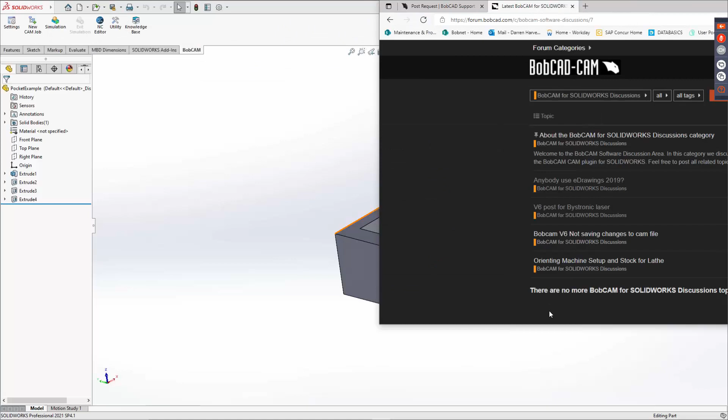So with that, I'm going to be working in V9 here. And again, I'm not going to be drawing anything in SolidWorks or anything. I'm just going to import models and work it off from there.

Let's just kind of take you around. If you haven't downloaded it already, you should go to add-ins. If BobCAD doesn't show up for whatever reason, make sure you check it off so it will. You can have it start up every time you open up SolidWorks, and you can have BobCAM also open up. We also put a tab up here with our knowledge base.

This is where you can set up hole parameters, basically for holes, counterbore holes, tap holes, and counterbore tap holes. Each one has different options. You can put an operation list in there. It just makes it a little bit easier when you go in and do your hole recognition, so we know what you're going to actually do.

So like a tap hole, one of them has a chamfer mill. If you don't want to use a chamfer mill, you can use a chamfer drill option instead, so you can change that up. You can add your own in here, and you can delete any of them. So the knowledge base is basically set up for holes, counterbore holes, tap holes, and counterbore tap holes.

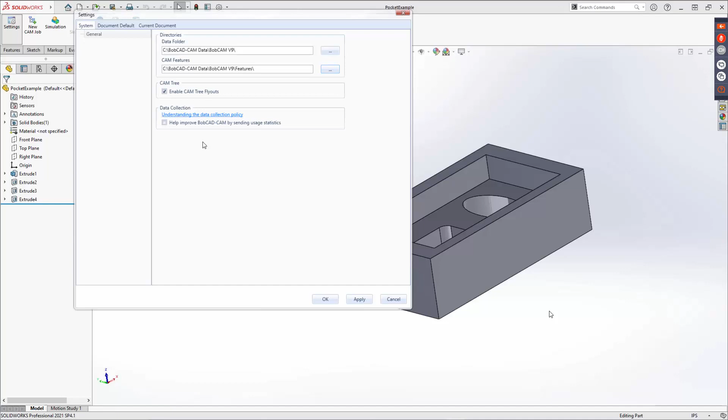So again, if you guys want to opt out of it, you can go into the settings under system and general, uncheck 'help improve BobCAD by sending your usage statistics.' You can uncheck that if you want. That's up to you.

Now we got our current documents and default documents. Notice nothing really changed in there. So you can set up your CAM tolerances, your simulation tolerances, your default machining order, how you want to set that up, your toolpath color, what color you want to set it up. Any of the changes that you made in this current document, instead of going over to default documents and doing the same thing, you just come down here and hit apply to default. Or if you do it under default, you can say apply to current document, and it'll work for the current document that you're in. Once you're done, you just hit apply and okay with that. And that's it with that.

Any questions or anything so far?

All right, so I'm going to go spread out the window here a little bit. Under the CAM Tree Manager tab, we have CAM Defaults. With the CAM Defaults, if you right-click on there, you got New Job, which you can do. If you've been with the software long enough, V4, 3, 5, 6, 7, 8, and up here to 9, you'll remember that in earlier versions - I can't remember exactly when we changed that - a lot of times you would have to go into the CAM Tree Manager here, right-click on CAM Default, and click on New Job. I still do that occasionally in SolidWorks here, but I've been trying to train myself to go into New Job up here. Again, I know some guys will still do it the old way, which is fine. We got our job from templates, if you want to use that.

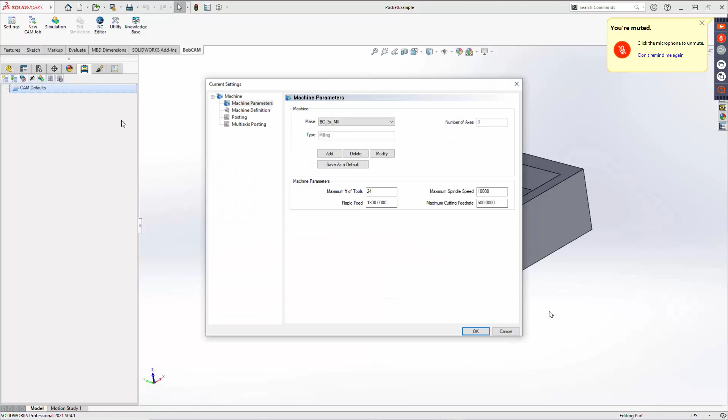Any of the default templates that you save, you can open those up and use those templates. We got our current settings - this is the default, remember. So you got your machine parameter, you can choose what kind of machine. You'll have a whole laundry list of them in there, probably not as much as I do because I work with customers every day and all day long here, so I usually grab their machines, or I'm creating one and helping out with posts also occasionally. You got different types in here that you can choose from. We also got an add, delete, and modify. I wouldn't delete any of the ones in here.

If you're specifically using like a Haas, a certain type of Fanuc, a Mach, or a Siemens controller, please don't delete all the machines and posts in here. Sometimes you might need to go in and look through them—maybe if you got a Fanuc post and something's wrong, we use the BC3X mill because that's a Fanuc based post, and we want to cross-reference to see if everything was working or not. So just don't delete all these. Leave them. What you can do is set up a default, so every time you right-click and do a new job, your proper machine and post-processor will show up if you save it as a default.

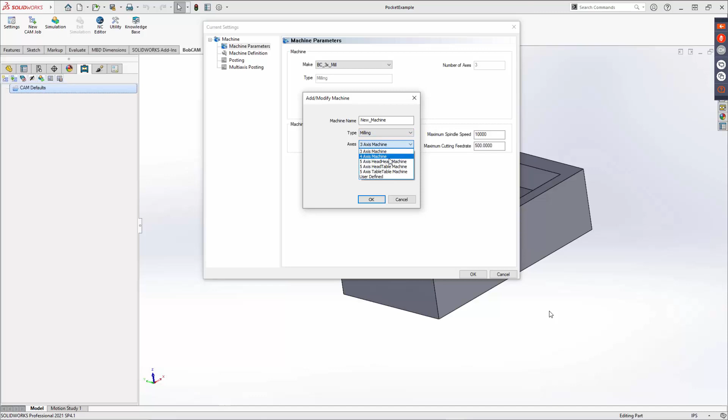We do have videos on YouTube, and they're a few years old, but they still work to this day because it's still the same setup. If you type in BobCAD space machine configuration or machine definitions, you'll get a whole bunch of videos on setting up your own machine if you want to. It'll go into setting up these machine definitions, what they're used for, and why we use them.

And again, this is if you have Machine Sim Pro—then you'll want to set this up too. If you have models of your machine, it'll show you how to import those in there. If you guys have Machine Sim Pro on your license, most of the time the mill-turn, multi-axis machining guys out there get a hold of our post department, and when they create your post, they'll even do a machine definition for you since you probably have Machine Sim Pro.

Now, a little caveat there is that we do require you guys to get the parts for the machine and send them off to us. We may have the machines, but if you send it to us, we can put it in your file, and if there's any changes needed to be done, we've got it all in your file. So again, we've got the machine definitions for this.

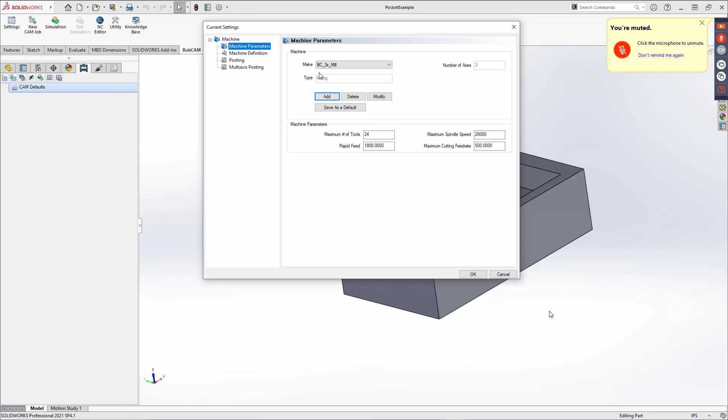But anything that you've changed in the posting, machine definition, or machine parameters, go ahead and hit save as default if it's your default machine. Now again, if you guys are running multiple machines, whatever your primary one is, that's going to be your default one, and then you can hit the drop down in the stock wizard later on, and I'll show you how to do all that to get what you need, whatever machine and post you're using.

Also in here we have our cutting conditions, so you can set up your center drills, pecking, reamers, chamfers, counterbores. You can set those up. Now, I've only seen this a handful of times of guys actually setting these up. They usually just do it right on the fly, especially for the pecking.

And that pecking amount looks a lot different than what I have on my standalone, but that's fine. Again, you can adjust it right on the fly. And this is stuff you don't have to set up immediately. You can set up later on down the road if you need to.

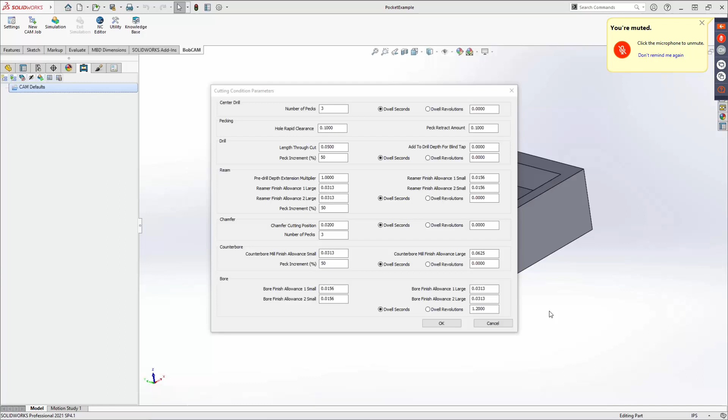When we go in to do a 2-axis toolpath and we happen to do a profile, even router guys, I would do this occasionally on my software, on my other computer. But specifically laser plasma and water jet guys, they would come in here and take out the rough because they don't need that, and they'll exit out here. Then all they'll have is when they get into machine strategy, because all they're doing is profile cutting. They're not doing pocketing, chamfers, drills, and so on. They're basically just doing profile cuts.

So they'll get rid of it, so they don't need to worry about, in the patterns page, the standard side roughing or contour ramping, or on the parameters page, all the allowances are set to 0. Those are things they don't need to worry about.

Where on my software personally, for a router, because I was doing a lot of flat router cutting, I would get rid of the finished toolpath and just use the rough. A lot of times I would use either contour ramping, if I didn't do standard, basically to keep the tool engaged the whole time.

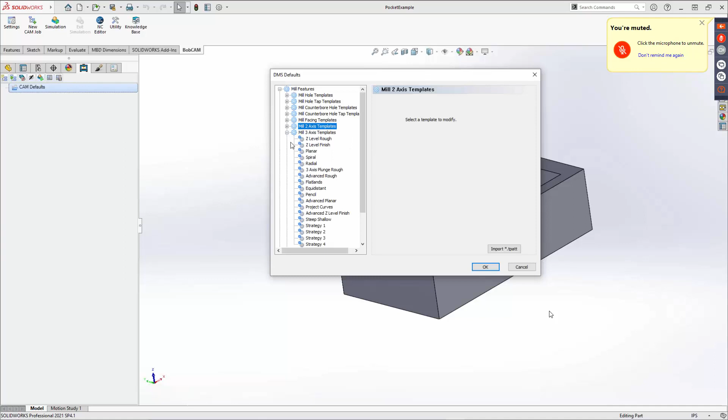So that's what the DMS defaults are when you get into your strategies page. Again, you can change like strategy 1.

You're going to see Z-level rough and planar. Z-level, or strategy 2, you'll see planar and Z-level finish. These are ones that you can change. So if there's something you like to use all the time, like on this one, you can get rid of the planar, for example. And we got an advanced rough and Z-level rough, or let's get rid of that and use advanced Z-level finish. So we got an advanced rough with an advanced Z-level finish, and that's going to be under strategy 3. So it's not going to be the default one that we have in there.

What does DMS stand for? Dynamic Machining Strategy. That should answer your question. DMS, Dynamic Machining Strategy.

So then we got strategy 4, where you got 2 advanced roughs, equidistant, and pencil operation. We're going to go into a lot of these operations later on. So any other questions with the DMS, which again stands for Dynamic Machining Strategy?

The funny thing was, somebody asked that a couple weeks ago when I was in Dallas on a seminar, asked me what DMS was, and I totally blanked out. I had to log in, open up our help file and find it because I just totally blanked out. I must have had too many tequilas or something that night. But anyway, no, I'm just kidding about that part. But I blanked out, so now I remember that every time now. So that's why I said it three times just to make sure, so you guys wouldn't have to worry about that.

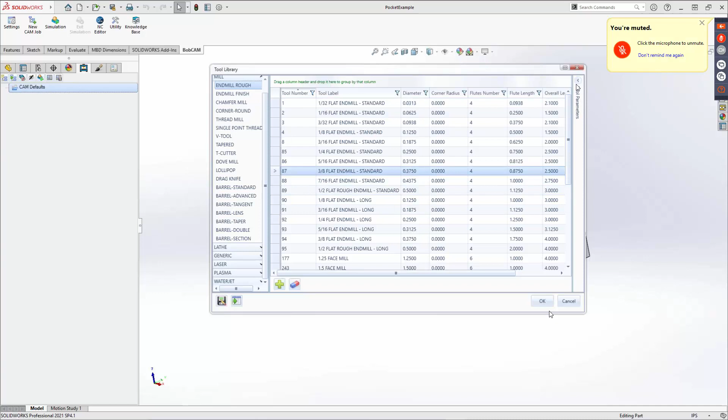If you choose any one of these, I'm going to go like end mill rough here temporarily, for an example, and choose like this 3/8 tool. And over off to the right here, you got your tool parameters. So with that, this is in a modified state now. Come in here and you can modify any one of these tools, okay? All the preloaded tools in here are modifiable.

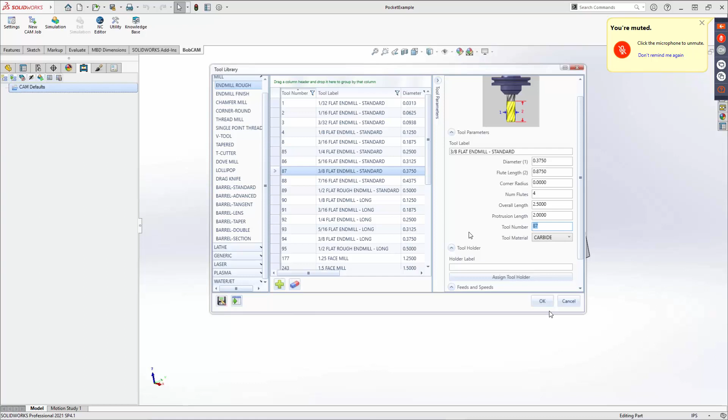You can come in and change it to maybe carbide and tool number 1, depending on how you set it up. You can assign a tool holder. You can come down here to the feeds and speeds. If you uncheck use system feeds and speeds, you can put in whatever spindle, plunge feed rate, and cutting feed rate that you want to use for that tool.

Now, with that said, when you're setting up the tools and the feeds and speeds on here, if you're going to do this, something like this null and voids basically what our material library is calling out for feeds and speeds. So kind of be careful. It's kind of one of those things. Do you want to use our material library as your feeds and speeds, or do you want to input your own?

It's kind of up to you, and honestly, it's like an 80-20 split for me when I talk to customers on this.

I don't know what's considered an older machine, what's considered a newer machine, that kind of stuff. But when they say, hey, I got this home-built machine and the feeds and speeds that you guys have for carbon steel or titanium or whatever are perfect for my machine, hey, go for it. I'm not going to stop you on that. But then again, we got guys with newer machines, and they're like, hey, your feeds and speeds are old. I get it. Nine years ago, ten years ago, development opened up an MSC catalog and said, here's the feeds and speeds that we're going to use for materials under the material library.

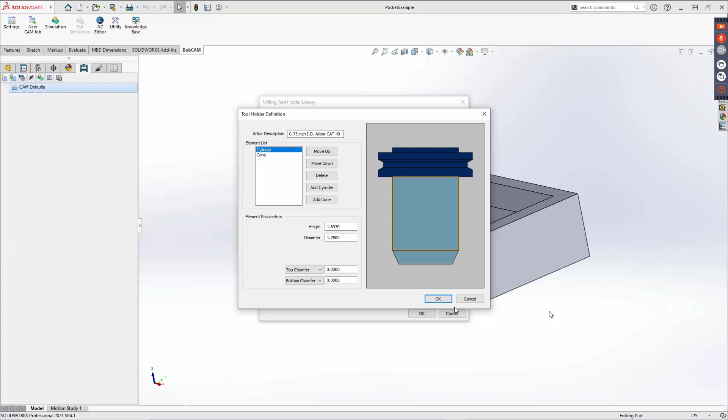Also, we have our mill holders - again, these are CAT 40, 50, and BT 40. So again, if you want to add, delete, modify or edit any of them, you can. You can see you've got, you can choose either cylinder or cone in this one. With that, you can also do a top chamfer, top fillet, that kind of stuff. You can do a bottom chamfer, bottom fillet if you want. You can set up height, diameters, that kind of stuff in there if you need to. So you can modify any one of these if you want.

And you can see we've got Renishaw now in there - there's our CAT 50s and our BT 40s in there and stuff. So again, you can add your own, you can modify any one of these if you need to.

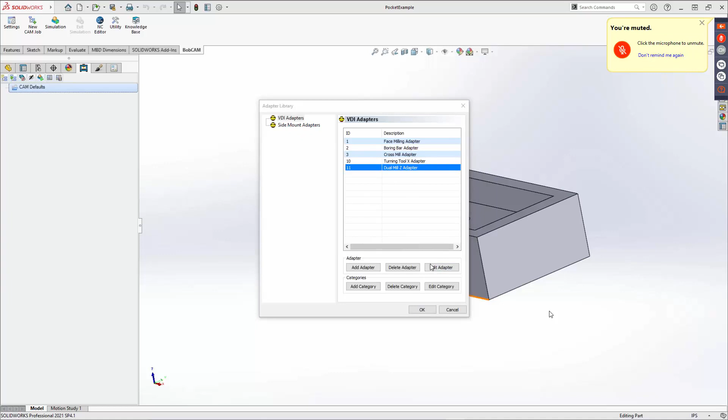Then we've got our adapter libraries. I'm not going to go too far into this one because this is more for the mill turn live tooling people out there. So you've got VDI adapters, which you can either edit in here. And with these, you can either load an STL in here, or you can modify it or add your own, draw it up in here. But yeah, you can see these are set up just a little bit differently than the regular tool holders - these are, like I said, for the mill turn live tooling customers out there, and you can move those around and everything.

Then let's see, we got that. And then we got our thread and material library. So it's thread library, there goes all our different tapping groups that we have, you know, BA all the way down to UNS in there.

You got UNC. So again, if you want to add your own tapping group, if you don't like the ones that we have, or you got something different that you want to put in there, you can add your own tapping group, and then you can put in your own thread list here.

Now you could add or modify any one of these threads in here. I'm just going to hit add a thread here, add or modify, both the same screen. You just fill out all the information along here, and you can add your own threads, or you can modify any of the threads that we have in here.

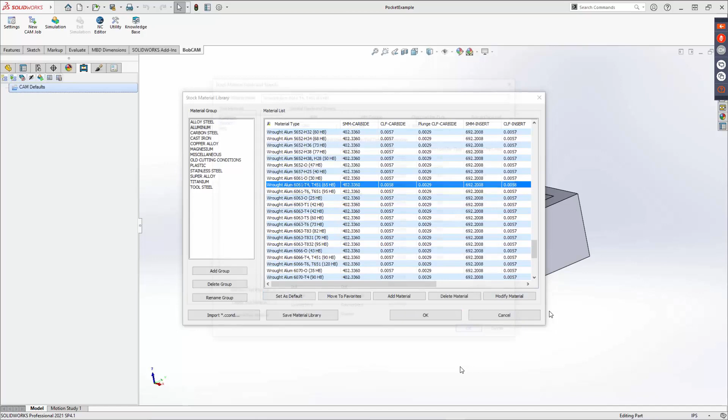You can scroll through, you know, different types of aluminum here. You got 60, 61 T4. The T451, you can add that as, you can save it as a default, so every time we go through the stock wizard and we get done with the stock wizard, that the material is always going to be that aluminum in there. You can modify this material, and you can choose what kind of tool material you're going to be using on it.

Is it carbide, insert, high-speed steel, HSS? You can also add your own new material, tool material. And whichever one you choose here, you'll notice that all these numbers are changing in between them.

Like I said, they just opened up a catalog there and went through and put in all the surface feet per minute, this SMM in there, all that kind of stuff in there. You can change the stock material if you want to.

If you check this off, you notice you can come in here now. This is all active in here. You can come in and put in your own options and stuff in there for the SMM, surface meter per minute, chip load, and flutes per plunge chip load here. You can set those all up on there.

And you'll notice that, you know, when you go and do each one of them in there, let's see, I think I may have changed one, I don't remember. Hit something accidentally in there, but whatever, I'm not too worried about it on there. So whatever you want, if you guys know all this, go ahead and put that in there. If not, you'll be fine any which way there with that.

Let's see something here. Oops. So yeah, we got different materials that you can set up if you need to in there and stuff on that. So any questions or anything so far?

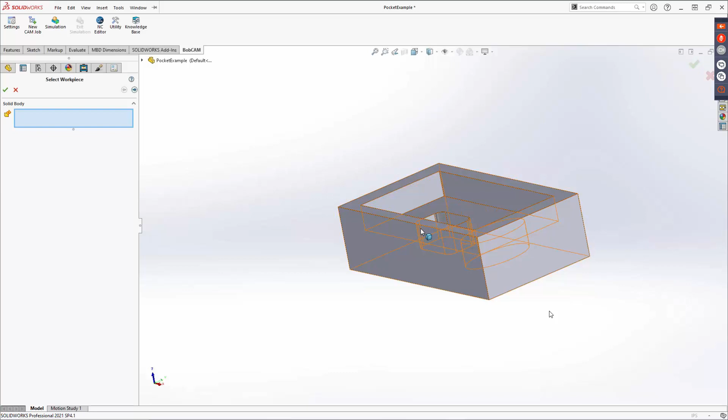From there, I'm not going to worry about it today. I'm going to go ahead and hit the next button right here.

This brings up our stock type here. So right now we're looking at a rectangle, but we have an option here for a cylinder, wireframe, solid model, STL, and revolve, so you can choose any one of those. I'm going to use the rectangle here. Moving on down, I don't need to worry about any offsets or what direction it's going, everything should be good. So from there, I'm going to hit the next button here.

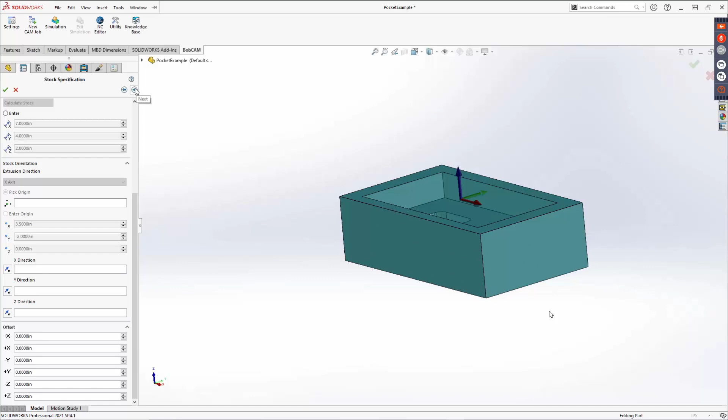This brings up my snap points for setting up for my machine 0 or part 0 here. So my origin is already selected, so I can come in here and choose either a snap point off my solid model, or I can choose any one of the snap points that are showing up on my screen. You can see, you can put it at the bottom if I want, or at the top.

If I need to change the direction of my X and Y, I can do that. So if I want my X to go down where the Y is, I can click in the box right here and choose that snap point, and you see my X and Y change. I can also change my X and Y if I needed to, or my Z. So if I go here to Y and choose there, it's basically gone back right to where I want it. Or I can pick from an existing UCS if I have one set up, or if I need to.

Also in here I've got my clearance plane. The clearance plane is the safety of your tool to move in and out of position or back to the home position. Once it's done, once it comes out of the part or off the part, it's going to go 1 inch above the part there and move either home or out to position, whichever one you're doing there. And again, that's a number you can change right there.

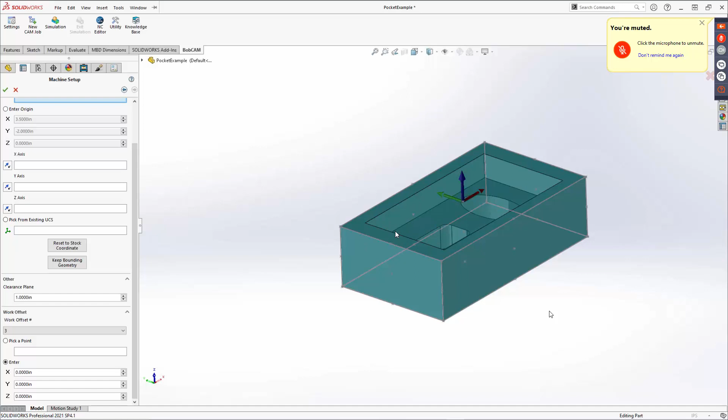So with the work offset here, if I set it to work offset 3, which would be G56, every time I go into posting on this part, whatever pocketing or profile or plunge rough, whatever I'm doing on this, when I get to the posting page, it's going to show the work offset 3 in there.

So I don't have to change it. A lot of times people forget about that and just do it right on the fly, which I still do to this day if I'm using it. So, work offset 1 is G54, work offset 2 is G55, and so on.

Unless your machine is set up differently, I know on my machine it was G901, G902, 903, and so on. Picking up a base point, this is if you got Machine Sim Pro, so I can come in here and say, let's pick this, there we go.

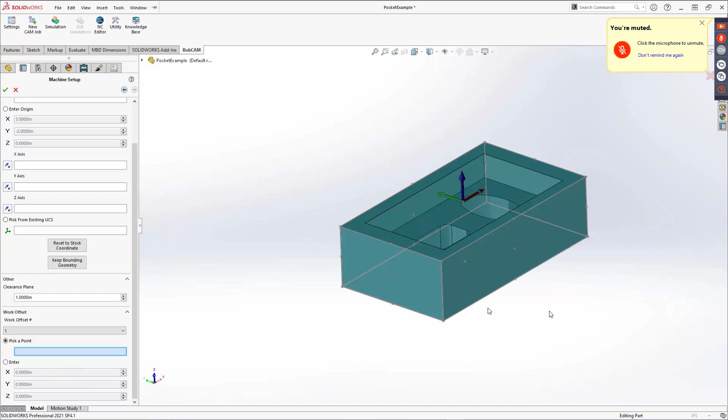I can enter the numbers here if I know the X, Y, and Z, or I can come in here and say my base point is right here, and it's 2 inches down in Z. So Machine Sim Pro, I'll get to your question there in a second, Ken.

Because I got Machine Sim Pro I can show my machine. Actually, the way we set this up is going to be everything from down here, not up this way. So basically my machine is going to be underneath here, on top of everything there.

Let's see, Ken's got a question. Since you have a solid model with the feature, why did you choose rectangle? Because it picked the overall... let's see, let me go back here.

And you know what, let me take off this real quick. Yeah, I'll just leave it there. Because rectangle here will pick up the overall X, Y, and Z of the part. I could have probably done the same thing with wireframe also, just did a loop selection around the outside. But rectangle actually picks up the X, Y, and Z of this part.

Does that answer your question? All right. Yeah, if I choose cylinder, which I think on one of the parts I have a cylinder, you'll see that also. It'll pick up the overall X, Y, and Z of that part. It's just an overall part.

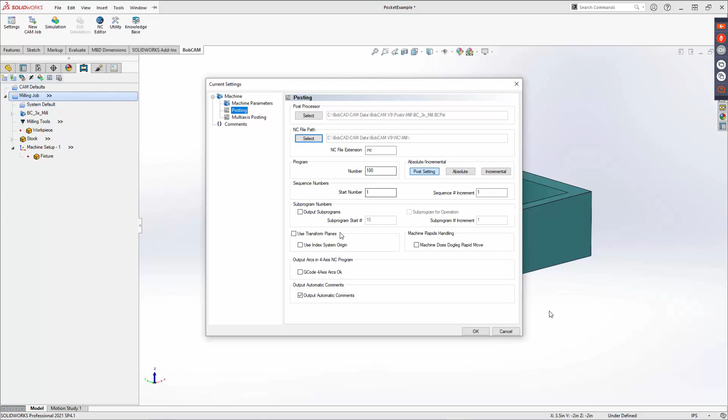That's where you have to do it under default settings. So for whatever reason, if you need to adjust the spindle speed, cutting feed rate, in the posting, make sure that's all set up. Make sure your automatic output comments are here. You can do all that. Notice there's no machine definitions now because that's all done in the default settings.

Also, you got comments here. So if your post allows it, I know there's a yes/no question in your post processor to output this. We got the output user comments here.

This is where you're going to have raw text showing up in your post processor with instructions of what to do, how to do it, when to do it, whatever you want. Lunch orders in some cases - I'm guilty of that one. I've put my lunch order in a couple times just so the guy running the machine knows what to order me from the local McDonald's. Anyways, you can do that kind of stuff in there.

So that's nice to have with the current settings in here. And again, this is all machine or job level setting in here, and you can choose a different machine if you want to also in there.

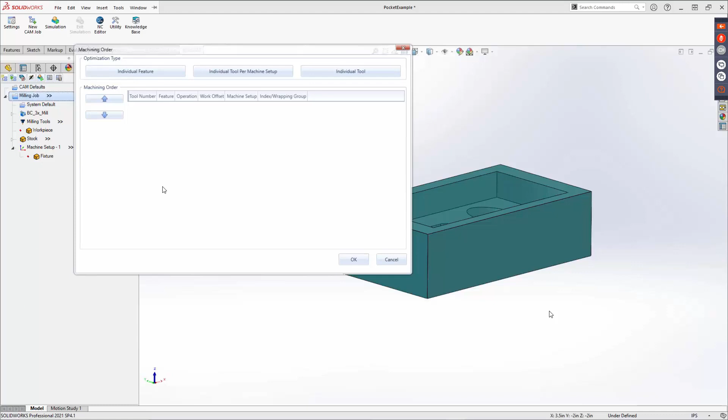Machining order, again, we're not worried about that one quite yet. We'll probably look at this later on when we go into simulation. It'll go by tool by default, but if you want to do by feature and handle tool changes as needed, you can adjust it from either individual tool per machine setup, or individual tool to individual feature in your tree. So that can make a difference too.

Also, we've got our post and post and save as. Post is where you're going to generate your G code, and you can actually do that with this icon right there. That's your post and save as right there - those two icons, post and save as.

I don't use those too much, just because - and I know there's a couple of you guys out there, we're all getting older, it's kind of harder to see these little icons. But guys with better eyes will probably end up using those. I usually right-click and do the post. I never do post and save as because I want to see the G code first, make sure everything's working out just the way I need it, then I can save it later on if I want to.

Generate sheet setup and generate sheet setup and save - again, I do the generate sheet setup. You've got different options in there for the mill setup, tool list, or tool list simple. I'll just look at the full setup here, which showed up on my other screen. There we go, I'll just drag it here. So again, this is just a default one that they put in here just so you can see what's going on, and it's actually a wire one for whatever reason.

And again, we've got something online on YouTube - if you type in BobCAD generate sheet setup, there's a video on how to modify this if you need to, especially if you want to get rid of this logo and put your logo in there. That's always a common one guys want to do. So in that video, I'll show you how to do that.

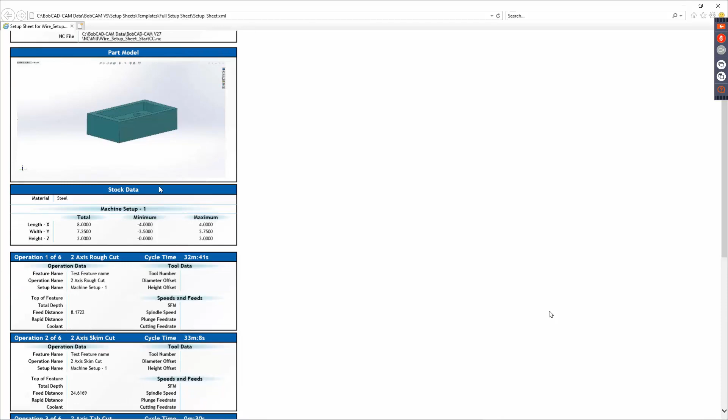So you've got your file, your post, the machine, date and time that this was created, the number of your program data - the mill is going to be a little bit different, so I'll just go over the overall. It takes a screenshot of your part model out on your screen, or however you got it set up. You've got your stock information, and then all the different types of cuts with all the feed rates and the times it's all going to take. And again, this is set up for wire for whatever reason.

Now, the reason why somebody would use this - one company I was working with would print this out and give it to their bookkeeper, and that's how they billed their customers, off whatever was on the sheet. Another company I worked with, the programmer would put this together - they had about 5 different machines running mill, wire, and I think a lathe. The guy programming everything would print this out, put it in a clear plastic bag with a thumb drive that had the G code, and put it on that machine for the day. Then the guys coming in would know what they're doing - they'd have all the information right here, and they could load up the program or programs, since sometimes they'd have 2 or 3 that they're doing that day.

So again, the generate sheet setup is a real nice option to have also. Then we've got the simulation here where you can go into simulation.

You've got toolpath statistics. You can open that up and see how much time it's going to take. It's a generate sheet setup, but it's just non-printable, something you can see right on the fly to see how long it's actually going to take to cut a part out, how much time you're going to need.

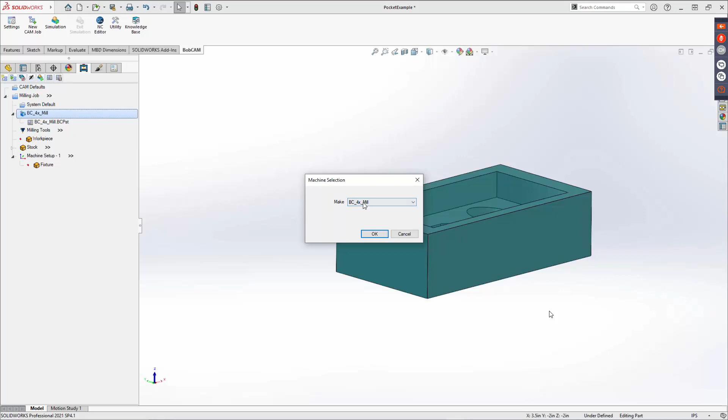System default—if I need to set up a template, again, set up my default template in here. If you've got an arrow here, always expand it because this is your machine, and this is your post right here. Again, if you right click on that, you can edit your machine, change it to a different machine, maybe like a 4X mill, and you'll notice that the post also changes. So I'll just change that back to BC 3X mill—there we go, and there's a 3X mill post.

If I don't want to change the machine but want to change the post, I can always right click on that, say edit, hit select. It should take me right into the mill folder, and I can change to a different post processor if I need to.

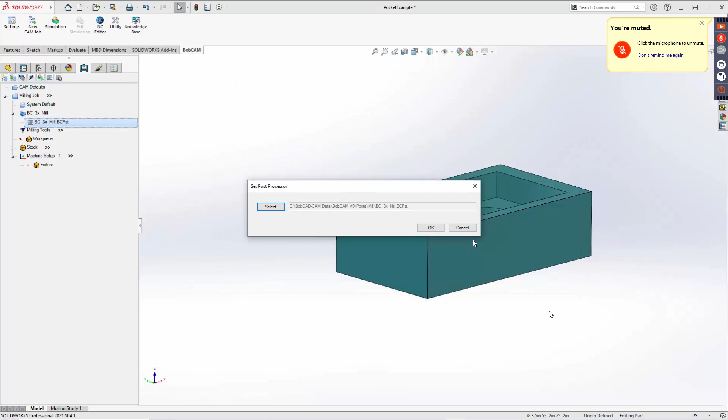I've got my milling tools, so in here I've got my tool library. Now if I click on the tool library—remember this is all at tool level now, so I won't see the lathe, I won't see laser, plasma, water jet in there. All I'm going to have is all my drilling options, including tapping, all my milling tools right here, and also my generic tools, which are the probing ones that we do offer now in V9. Again, we're not going to be going over probing at all in this session.

Again, here I can change any of the tools that I need or anything in here, and these are all at tool level. I'll come to the tool crib here in a second. We've got the holder and verified tool assignment. Tool holder—if I want to change to a different tool holder, I can do that instead of using whatever the default is. Verified tool assignment, you'll have all your tools showing up right here.

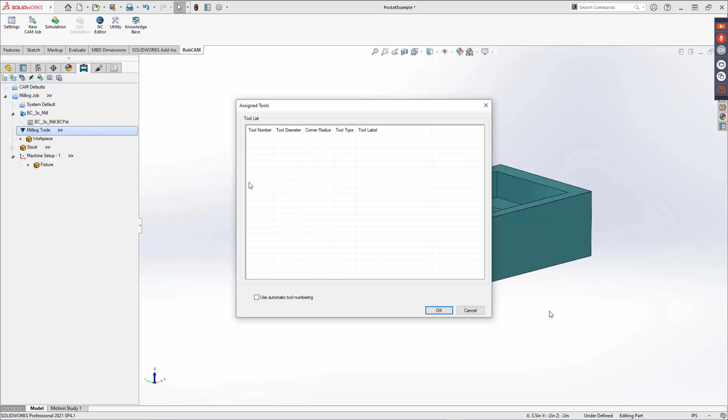Basically what you can do is uncheck the automatic tool numbering, and new numbers will show up. You can double click on each of the tool numbers and change them if you want to or need to. I know some machines require certain tool numbers because that's what they have in their background and stuff on their controller.

Tool crib. This is nice. A lot of multi-axis guys will use the tool crib because they have certain tools that they use. But for 2 or 3 axis work, they're great to have, especially if you have multiple machines. Say you've got a Haas machine, a Fanuc, and a Mach, and each one has different tools on it, but you're running one copy of SolidWorks with V9.

What you can do is load in all the tools in this tool crib, and you can save it out, and it should go into C drive, data, V9, technology, and there should be a cribs folder. So you'll save it in the cribs folder, and it's going to save it as a tool crib, milling tool crib - that's what MT stands for.

You can load that in every time, but be careful when you save this out. Every time you go through a stock wizard, before you put one tool path on there and use the tool, if you've got a tool crib already set up, open up the tool crib first. Because when we go into a tool path operation, it's going to look in the tool crib first before the tool library. But if you don't have a tool crib, it looks in the library first to decide what tool is going to be used. Now, I'm going to be using the tools library here, so I won't be using a tool crib at all.

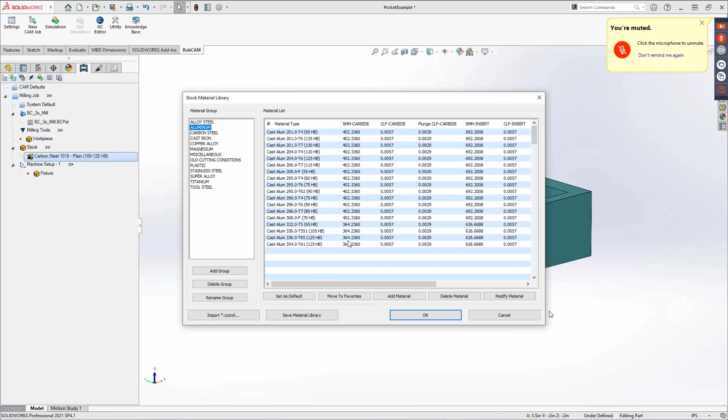Workpiece - if you want to select a workpiece, you can, but again we've got a solid model, so it's going to show up as a workpiece in our simulation anyway. You can see here I've got carbon steel as my material. If I want to change that, right click and change the material, go to aluminum, maybe 6061, I guess - I'm just guessing on this. 6061, yeah, that should work. Say okay, and you can see it just changed right there.

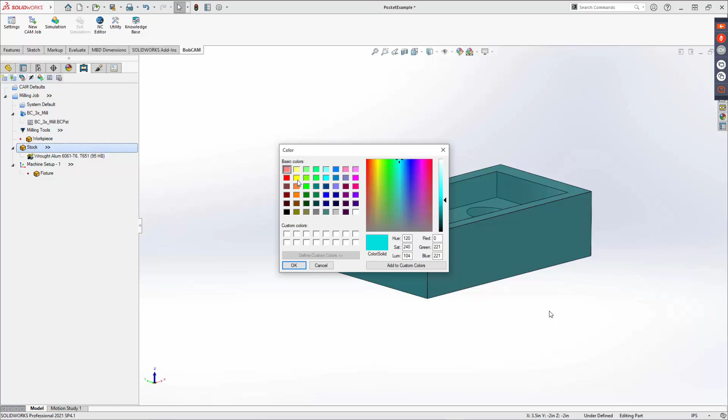Here I've got my stock. If I right click on there, it'll take me into the stock type and the stock wizard, and I can redo my stock wizard. If I want to change the color of my stock, I can change it to, let's say, yellow here. You can see it changed to somewhat of a yellow. The reason you don't see it too well is because of the transparency - right now it's running high. So if I keep it down low here, say okay, there's my stock right there.

Now because of the color combination in SolidWorks, the yellow just isn't jiving too well with that. Everything's there, it's just kind of hidden within that whole stock, and it could be kind of hard to select geometry if I need to, the proper geometry. So what I've seen some guys do - under the transparency, and again you can set this as default - they use it high, so basically it's there but it's not there, it's invisible. So you can do that if you want, or you could use transparency. I'm going to come back down to about here, say okay - there it is right there.

And I'm going to use what's called blank/unblank. If I left click on stock, you can see it shows up right here. If I left click on something else other than stock, it goes away because I've got it blanked out right there.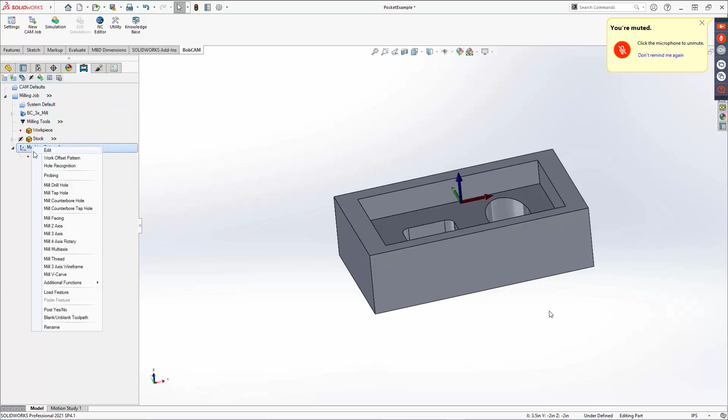Then we've got our machine setup here. If I go to edit, this will take me to the last page of our stock wizard, so if for whatever reason I need to change something like the clearance plane, I can do that right there. If not, I can X out of that and get it all set up. If I right click here, I can set up work offset patterns, hole recognition, probing, and go through all my tool paths right here.

So any questions or anything so far?

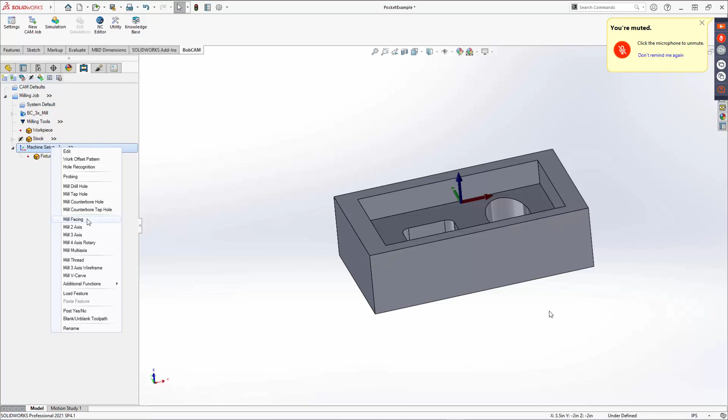We're going to get started here. So what we're going to do is come in here and look at just two axes right now. We're going to start off with mill facing here, because we set up our stock, that's what we set our stock up to and everything.

With this new mill facing, if you had V8 and below, in the mill 2 axis, you had a facing operation where you had to go in and select a geometry. Now with this new facing, it's stock recognition basically. So if I set up my stock the way I want and how much I wanted to take off, it would see that. It's still going to see it right now. I can also choose my geometry if I want to.

I don't need to because it's going to work off the stock wizard we have. So I'm going to go over here and say next. Now my total depth is actually going to cut off 100 there, so 0.1. But I'm going to move the stock up, or the tool up 0.1 also. So basically when it goes down to 0.1, it's going to be right across the top of this, okay? It's not going to be down 0.1 here, cutting into our material here.

It's going to be just right at the top on there. Because I didn't select any of my geometry, I don't need to worry about the internal loops or the bounding box in here. And you'll notice whichever one I select, the other one grays out on me there. So I don't need to worry about that. And again, I got my clearance, rapid, and feed right there. So from here, I'm going to go ahead and hit next.

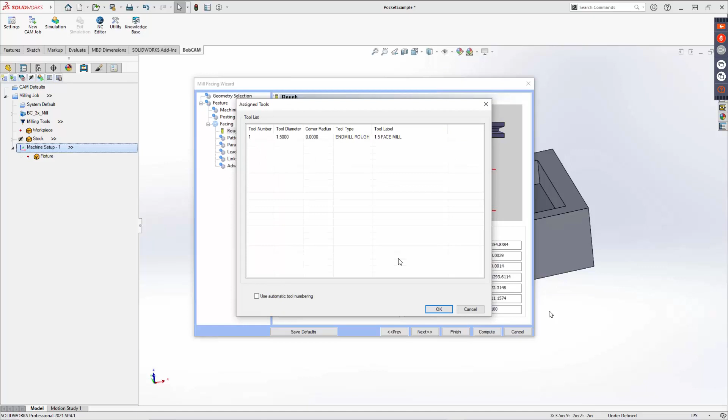If you have coolant on here, you can use either flood, oil, mist, or air, or you can turn it off on there.

So Tom's got a question there, pretty good question, and the answer is not right now. Can the coolant selection be set as a default for a specific tool? No, but that's a good question. Good feature request put in there. But yeah, see, these are good things about these live events here, is you get good questions.

No, there isn't, Tom, unfortunately, but I will put that in for a feature request to our development guys. So how about a specific machine? I'm going to be batting 1,000 with you apparently here today, Tom. No, there's not. No, there's not. Now, there is, and now this is only a default for, you can set it as a default on here, set as a default, but again, that's going to set up everything on this page as the default, so that's probably not what you're looking for. You're looking for a specific, especially when you're going to the tool crib, endmill rough. I'm just using this as an example here.

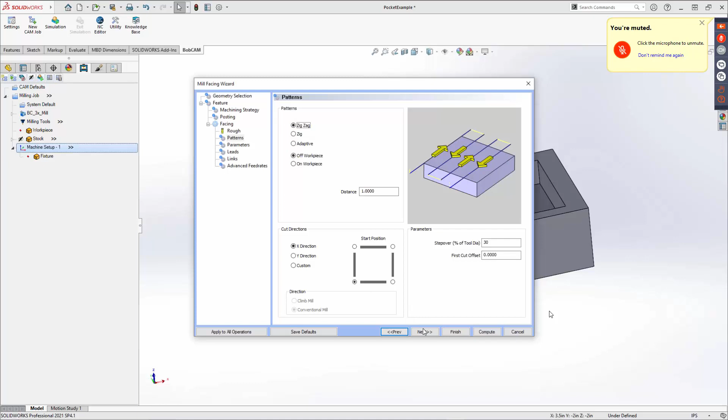We'll hit next, we get into the pattern. If you want to leave a bottom allowance, you definitely can do that. We're going to do this in one step, but you also have an option here to do multiple steps. We're going to hit lead.

This one has a vertical lead in or a parallel lead in - you can see what it's doing there. You can set the length there, we'll just do a vertical here. And whatever you do on the lead in, the lead out's going to do the same unless you uncheck it, and then you can choose something different in there. From there we'll go ahead and hit next.

We've got our linking - I like this now. You've got direct, you can see what it's doing here and how it's going to link from toolpath to toolpath. Direct is basically a straight line across, or you can use an arc. I like using an arc because it'll slow down a little bit, make that arc, and then speed right back up into the cut there.

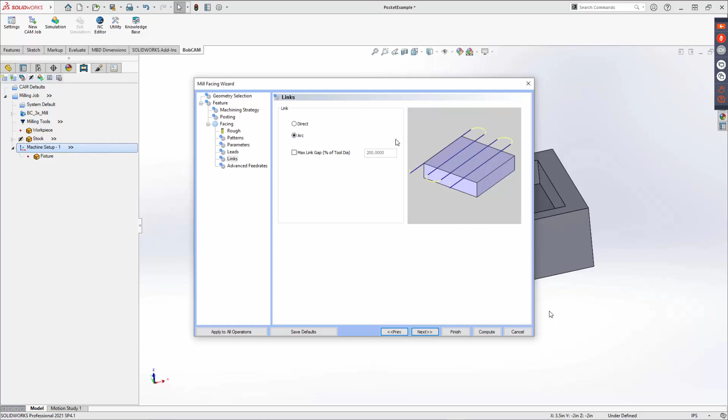Where with the direct, it will end right here, stop almost dead, move over, and then pick right back up and continue cutting on there. So I personally like the arc move - that's just me, but you've got that option if you need to. From there we'll go ahead and hit next, and we get into advanced feed rates.

Advanced feed rates you'll see on every one of our toolpaths, 2 and 3 axis. With the advanced feed rate, general override is going to be the standard you're going to see on every toolpath. We can convert rapids into feeds, and different toolpaths will have different options. This one has, and you'll see it for profile the same way, chamfer the same, lead in and lead out percentage.

So instead of going 100% of the feed rate, you can change it to either 30 on the lead in and 250 on the lead out. Whatever you want to do, you have those options in there.

With that, you'll notice we have no more next. We got finish and compute. Finish will hold all our parameters, and we can compute them at a later time if you've got multiple features that you're doing, or you can just go ahead and hit compute. And there's our toolpath right there.

So with that, you'll notice that it's picking up our geometry. The toolpath is actually going right down to our level right here.

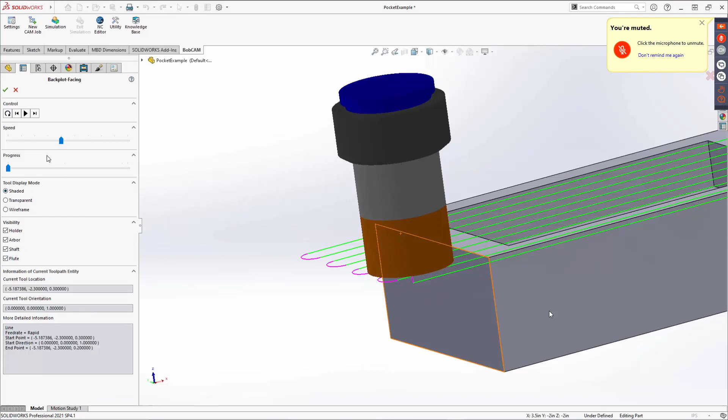If you right click on the facing or whatever toolpath you're working with, the third one down is this back plot. So with the back plot there, I'm going to slow the speed down because it's going to go by quick. And there it goes.

The bad part about it is if you do the back plot and hit it, it doesn't matter what speed you're using, if there's a straight line, it's going point to point. It's not going to just go zooming right across making sure it looks good. It's going, don't rotate over. I'll slow it down even more, restart. You can see, point, move over.

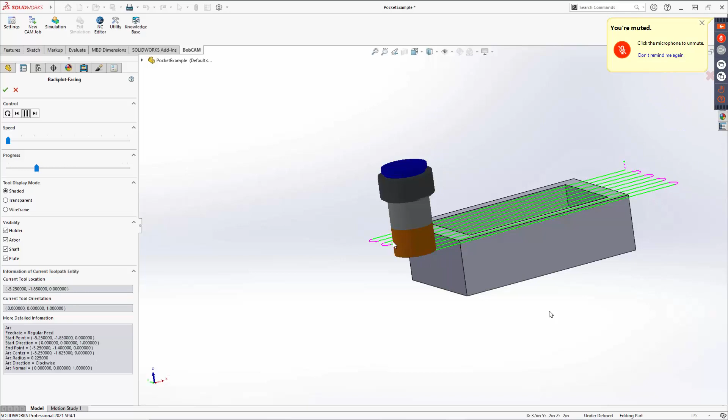And you can rotate this around. This is just so you can see it right on the fly if you need to. Again, if you want to see the tool information, you can look down here, and any detailed information is down below. It'll tell you feed rate, rapid, start point, end point, direction it's going, that kind of stuff. You can change it to transparent or wireframe depending on what you're doing. So the back plot is actually kind of nice to see right on the CAD screen, so you don't have to go into simulation every time, check it out, and then leave the simulation for later.

So any questions with that right now?

All right, so I'm going to right click on that feature and come down here and blank it out. Now again, if I click on the facing it shows up, and if I click on something other than facing it will go away, and I can shrink it up.

One thing I didn't go over is these little arrows. These are the flyouts I was talking about earlier. If I hover over here or left click on it, you can see I got program number 100. If I want to change it in my G code, let's say to 951, I'll just hit apply, and then when we produce the G code it will show up as program number 951. So that's what the flyouts are good for.

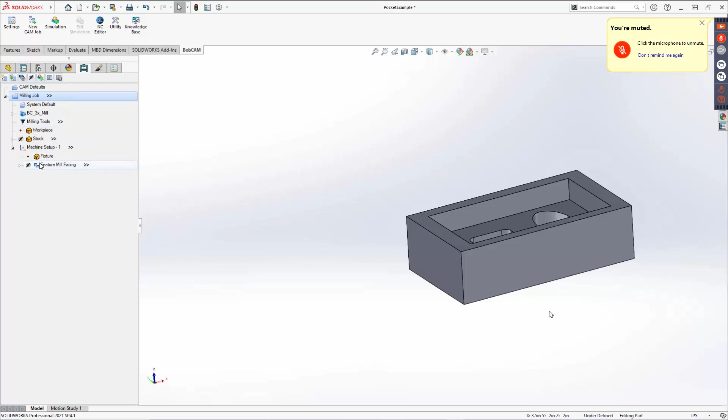Depending on what you're doing, you got this one here. You can come in and if that should be unchecked, you can change it. Like on this facing, even on any of the other toolpaths, you can change the spindle speed, cutting and plunge feed rate right on the fly with those flyouts. So you can do a number of different things with those flyouts.

Honestly, I don't find it too much of a problem, especially in SolidWorks, but in the standalone, if you have your mouse over here like this, it'll show up, and for some reason it's hard to get rid of. SolidWorks I never had a problem with, and it works out well for me.

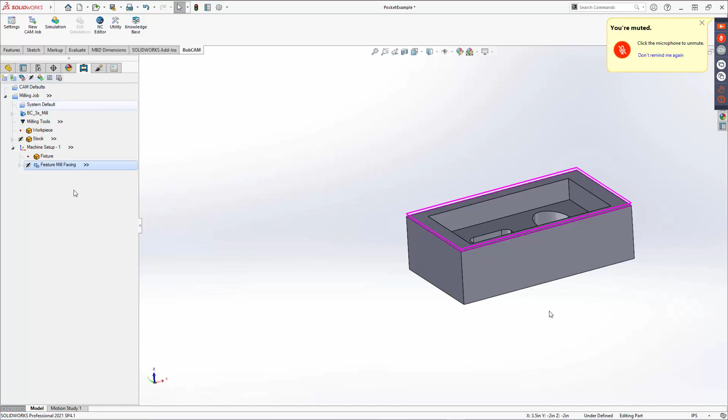I like it. All right, so let's go ahead and do a pocket operation here. We're going to go 2 Axis, click on Select Geometry, and what I'm going to do is right click on this edge right here. Whoops, let's try that again. And I'm going to go Loop Select.

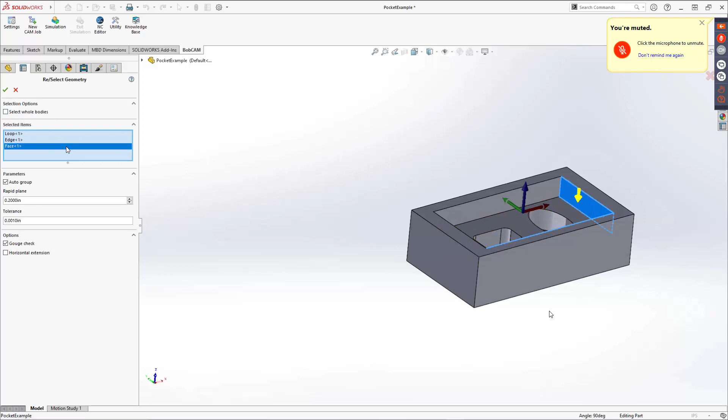Well, I guess it's not going to do what I want it to do. So I'm going to clear the selection and just do it the old-fashioned way. Maybe I would have done this one. There we go, that works for me right there.

So I got my loop select here. Now I could have done that, or I should have just gone through and selected all 4 edges right there. That should have worked out fine. So I got my 4 edges there, and I'm going to go ahead and say OK.

That brings me back into the geometry selection window. From there, I'm going to go ahead and hit Next. I got my feature page with my material approach right here if I need to adjust it, and then I also got my top of feature and total depth.

Now for my total depth, I'm going to go ahead and click on the bottom here, and click that bottom edge, because I don't know how deep it is. It is 0.8, so it did calculate that properly for me. So that's the total depth we're going. Then we have our extensions.

What these are, if I have closed geometry like right now, versus open geometry, which on this one they selected just these 3 edges right here, the toolpath is going to start off the part and end off the part, either 50% of the tool, or if I click on the percentage right here, it'll change it to a distance and I can set that distance. Whatever I do for the start, the finish will follow unless I uncheck it, and then I can change that to whatever I want.

But because we're using closed geometry, we don't need to worry about that, so I'm going to go ahead and turn that off and hit Next.

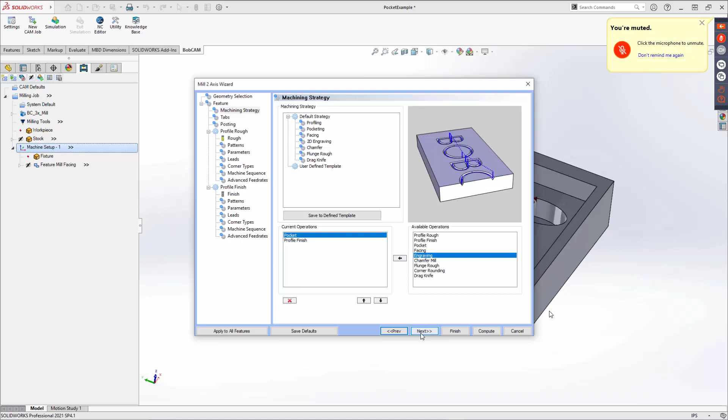Now, if there's anything you want to bring over, you definitely can do that right here. So you can, if you want for whatever reason, bring an engrave over or a chamfer mill, you can do that. If not, we'll just go ahead and hit Next, and you'll notice the tree changed right here to a pocket with a profile finish.

Tabs are if you got a lot of flat router guys out there. Maybe Tom may use these if he's got multiple, if he's doing a lot of flat routering there. Again, I'm just assuming.

If you got multiple parts, say you got like a 4x8 sheet of material and you got all these parts arrayed onto here, so you want to use these tabs. What tabs will do, you can set them up and apply tabs to something, and we can set a width, angle, and height.

Now, usually angle we'll just leave alone at 90, but the width we change to whatever width we want, and that's this width from line to line here. And then the depth, how deep do you want it? A lot of times you'll keep it like, I usually left mine at like 0.05.

So at the bottom of the material, most of it's all going to be cut out except for, let's say this corner right here, it's going to have 0.05 of material left on there, and I can just take a razor knife and cut it off if I need to. But that's what tabs are usually used for, a lot of flat router guys will use those if they need to.

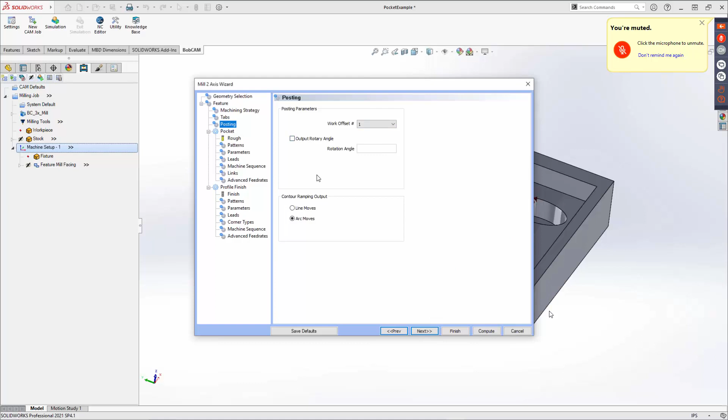Again, we got our work offset, output, rotary angle, how do you want your code to come out, in line or arc moves, depending on your machine and how your post is set up. From there, we go ahead and hit Next.

We get into our tool page. You can see it's actually picking up our 1.5 inch face mill. We can come in here, hit tool crib. The face mill might not be too bad if you want to use it, if it's not indexable.

Let's go ahead and use, I'm going to just use my 3/8 tool. That's always my go-to tool. And we'll say okay, and again, I'm not going to worry about feeds or speeds or anything.

Not worried about the coolant or anything. I'm going to go ahead and hit next.

Now with the pocket operation, I've got standard pocket and advanced pocket. Standard pocket allows me to either do parallel, offset out, or offset in. I can start from the center and work my way out, or from the outside and work my way in. I've got climb or conventional, and I can use spiral for a circular pocket, plus my step over amount.

I usually use 30 on my pocketing operations. That's just my go-to number, but other guys I've talked to use 40 or 60 percent step over and that works for them. 30 is always my go-to number because 40 to 60 a lot of times leaves material for guys doing a profile finish. I never did a profile finish when I did this, I always did a pocket, so 30 was my go-to number and it cleaned up pretty well.

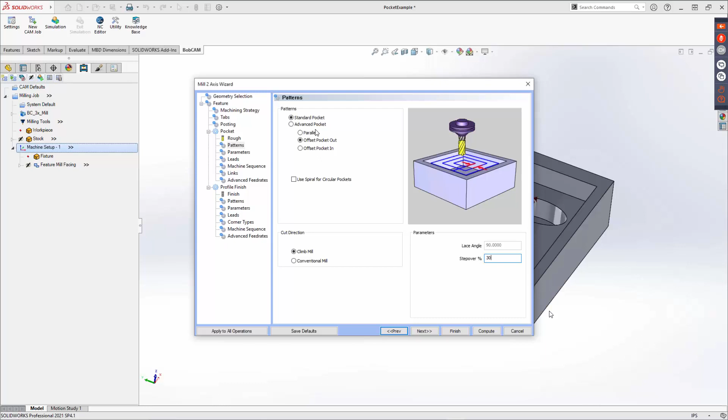Other things in here with the standard pocket, that's pretty much about it. But you also have advanced pocket, which adds in a morph spiral option - it doesn't matter what the geometry is, it's going to do a continuous spiral around the part. You can also do adaptive roughing or trochoidal cutting in there, and this also allows you to use a parallel offset in or out here also.

But the nice thing is, especially when it comes down here, you have this rest roughing. So if I wanted to come in with another pocketing operation with a smaller tool, on that second tool operation I'll click on this rest roughing. You'll see the previous tool, the radius if there is one, and the allowances will show up right here. So what this does is say, hey, he used that 3/8 to come in here and cut everything out. All I need to do now is come into the corners and cut the corners out.

And that's it, everything else is good. That's all the rest roughing is. I've done it a lot of times on projects I've done in the past, so it is really nice to use.

Going and getting areas that I need to pocket out, especially around lettering, I use that a lot. But here we'll do a pocket out at 30%. We'll do a climb cut, one direction, that should be fine, just go in a circle the whole time. And then from here, we'll go ahead and hit next.

Now by default, the pocket operation has this 15 thousandths side allowance in there. If you want to change that, you can definitely do that. Right now we're looking at a total depth of 0.8, so it's going to do a single depth unless I check this off, and we always divide it by 2. So it doesn't matter how deep it is, it can be like 4 inches, the software is always going to divide it by 2 here.

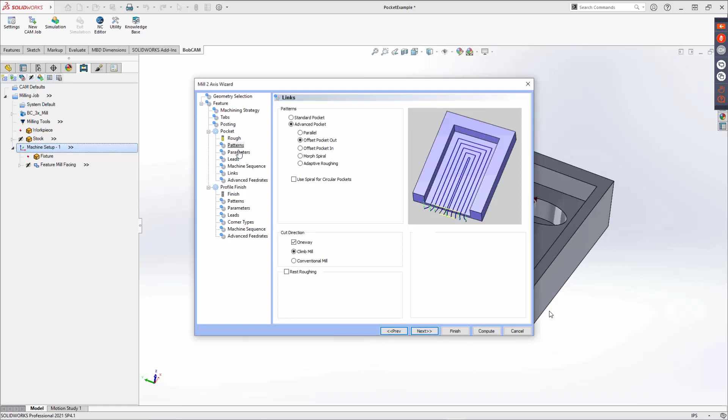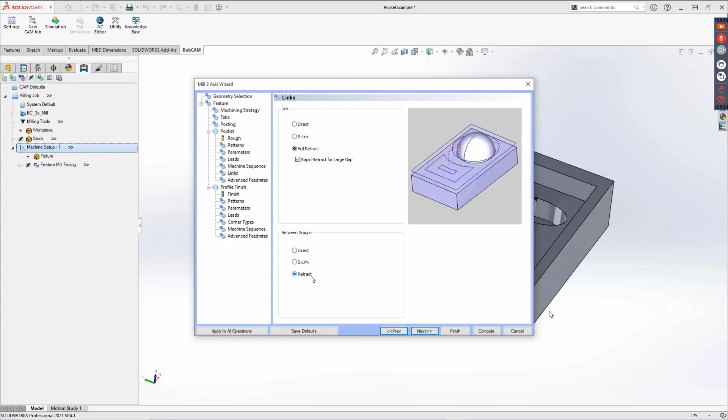So from here to here, it's direct, and from one area to another it's also direct. Now because I'm using advanced, I have a direct option for between groups and link, S link between, or pull retract or retract. So I've got different options when I use the advanced option, if I need them. But this is pretty basic, so I'm just going to use direct.

From there we've got our advanced feed rates. Again, if you need to use the advanced feed rates, you can definitely do those. General override, link here, and then we've got standard or adaptive. We also got corner slowdown if you need to utilize those.

From there we've got hit next, or you can hit finish. So it's looking at our finish tool as a half inch. We can always go in, and with the finishing tool it gives you all these different tool options. So if you want to use something different, you definitely can. For some reason, if you want to use a T-cutter, go ahead and use that.

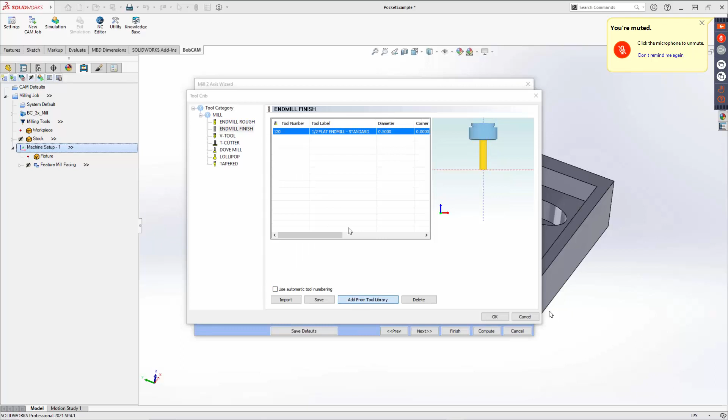We'll go ahead and use Endmill Finish. We'll add from library, and choose this quarter inch standard right there. We'll say OK, everything's good. Notice I'm not worried about any feeds or speeds right now. From there we'll go ahead and hit next.

We've got our cut pattern here, so we're going to use standard. You can either go system comp left, right, or off, and if you want you can use machine comp G41, G42 also. From there we'll go ahead and hit next.

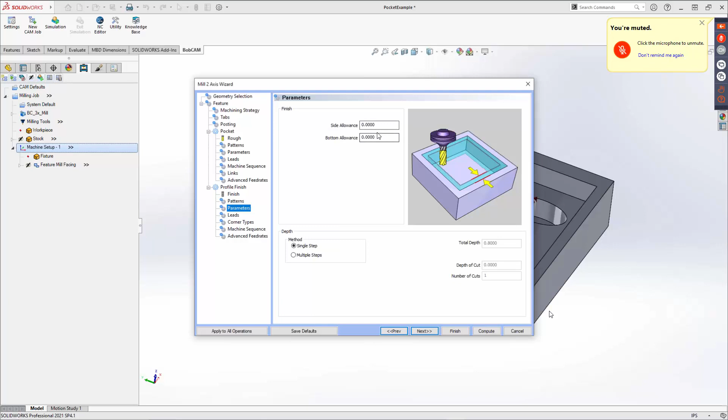We get into our allowances, so you can see here it's set up for 0 under the finishing. We'll do a single step on this one because it's just going to do the perimeter right on the inside there. Should be good. From there we go ahead and hit next.

We get into corner types. So you can set up either sharp, round, loop, loop length, and the same for the internal, and you can see what it's doing. A lot of times I'll tell people using laser or plasma to use any of these, just because if you go around a sharp corner instead of burning, you want to use one of these options, and you can set the parameters up so it's not too bad, so you get a nice sharp corner if you need to.

Here I'm just going to use sharp and let the tool take care of it. It is going to make it a radius in there for us, I know that. It's not going to make a nice sharp corner.

And then we've got our sequencing if we need to utilize that, and our advanced feed rates from there. So from there I'm going to go ahead and hit compute.

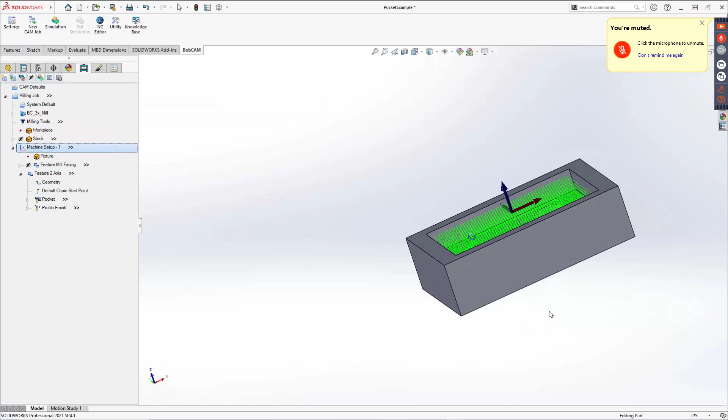Let that take effect, and there it is right there. So I'm going to come up here and do a save as, and I'm going to save this. I'm going to keep the name the same. I'm going to go to desktop and just save it on my desktop. And yeah, I know it was saved in an older version. And there we go. So any questions or anything so far with this?

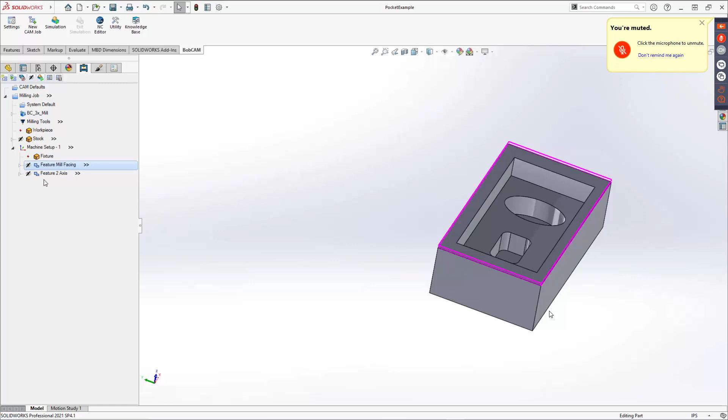And I'm going to go ahead and blank that out. That's just something I do here, this is just OCD of me. When I'm done with a feature, I will blank it out, and I also will collapse it there, so I know those are done. For me at least, I may want to go back in and change those.

So let's go ahead and right click, and we'll go another 2 Axis here. Select geometry, and I'm going to try to do the loop select. There we go, that works.

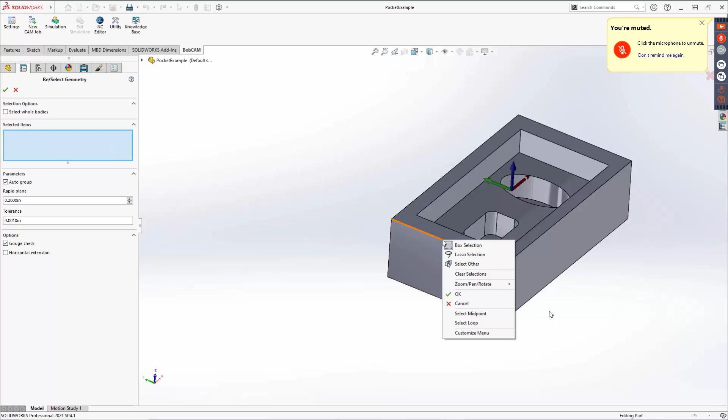And let's go to the outside there. Let's clear the selection. I'm going to keep that as is, so I'll go ahead and say okay to that.

Brings us back into the geometry selection, so you're going to see kind of the repetitive thing going on here in 2-axis, at least right now. Total depth, I'm going to go ahead and pick bottom here, and pick the bottom there. Now this is just a generic one, so I know it's 2 inches. I can go 1.5 if I want to, if I got it on a fixture or something, if I don't want to go all the way down for whatever reason. I can definitely do that.

Again, same setup here. We're going to do profile, rough, and finish. That should be fine. Again, not worried about the tabs here.

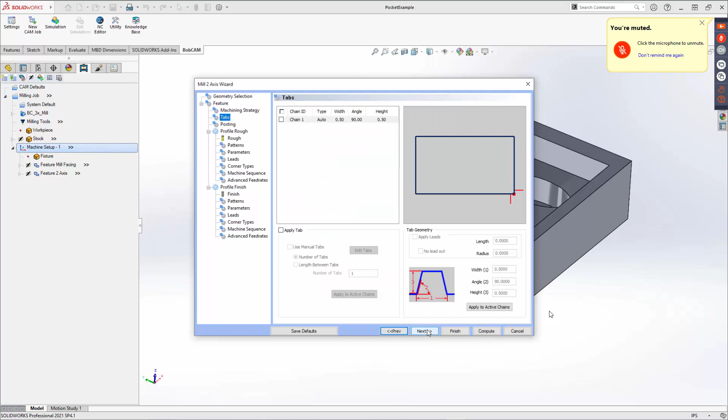Posting should be fine. Tool setup. Now, I'm going to go ahead and use the 3/8 here, and the quarter finish tool should be fine with all that. Now here we got our profile rough.

We got standard cut. What it's going to do, if I'm doing multiple step downs on there, it's going to make one revolution, come up out of the part, and back down, do the same thing over and over again there. That's what the standard does.

Contour ramping keeps the tool totally engaged the whole time, and it'll just corkscrew all the way down. Side roughing allows me to basically, for lack of a better term, an open pocket on here, so I can start on the outside and work my way in and down at the same time.

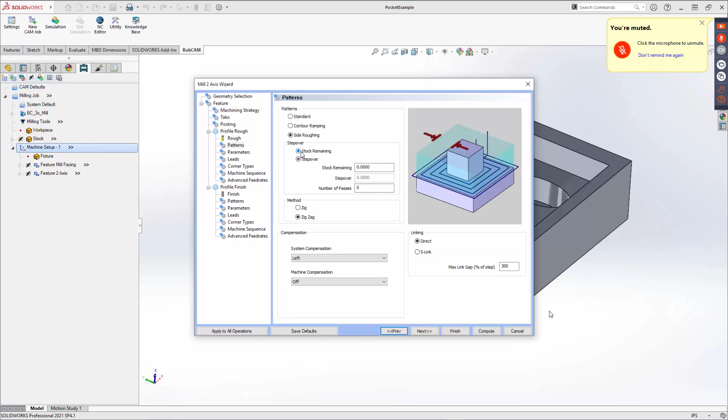And I can set my number of stock remaining. If I want to do a step over, I can activate that and set that up if I don't know the stock remaining. And I can set number of passes in there, and I can either go into zig or zigzag motion in there. I'm not worried about that because we don't have any stock to worry about, so we'll just do standard on this one, and that should be fine.

In fact, let's do contour ramping. Everybody knows what standard is. And we'll go ahead and hit next.

We also got the system comp. Software will dictate right or left on there, or off. And we can do machine comp G41, G42, just like in the profile finish toolpath there.

So here, again, we'll leave 15 thousandths. Now, depth by pass, or per pass, or angle. If you know the angle, you can set that up. I usually set depth per pass on there.

So I'm going 1.5 inches down, so I'm going to go 1.5 total depth divided by, let's say, 7 steps. And it's going to go down every time, 0.2143 every time on there.

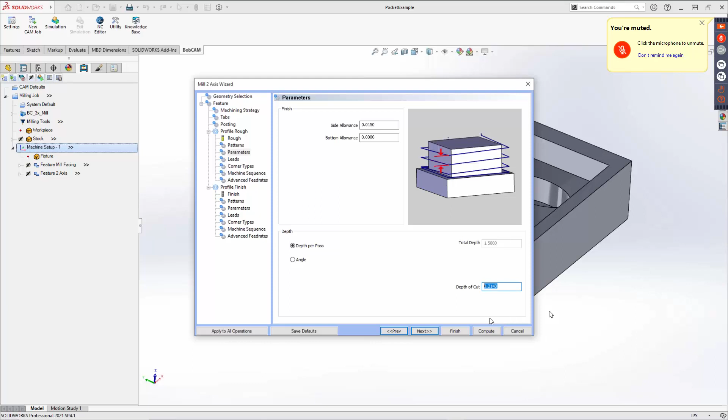For this one, it's okay. I got my lead in and lead out. Again, if you need to set those up, I'm just going to leave them as is for right now. Our corner types, machine sequencing, and advanced feed rates if I need to utilize that.

I'm going to use the same tool here for the finish pass here. I got my patterns here, my machine parameters here, my lead in and lead out if I need to utilize those or I want to. And I got my corner types, machine sequencing, because I only got one, and my feed rates here if I need to utilize those. So from there, I'm going to go ahead and hit compute.

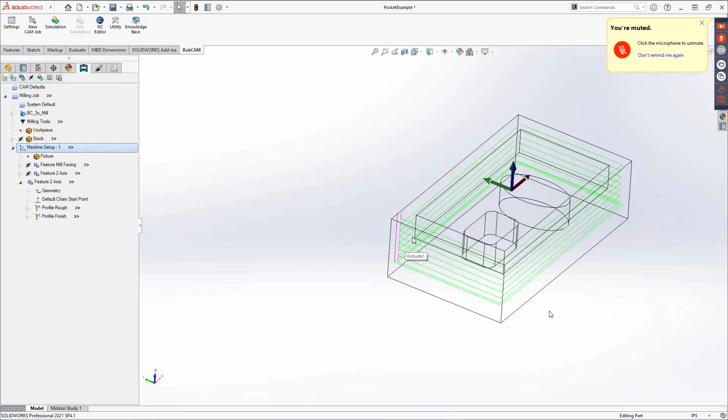And you'll notice in here, I think this toolpath is actually on the inside. We need to flip that on the outside here.

So we'll go back to the solid. I'm going to go to default chain start point here. I'm going to right click, and I can either hit modify, which allows me to change my start point to maybe the middle here, and then I can change the direction also by left clicking on the back end of that arrow.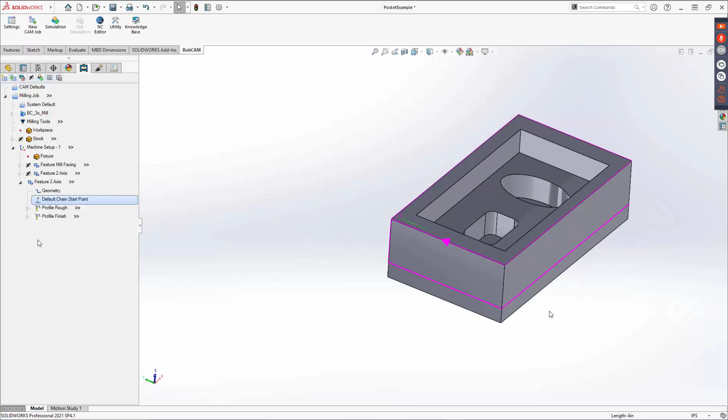And then I'll just come right over here and say okay, right click on feature 2-axis and compute all toolpath, and there it is right there. So instead of starting on that corner, I'm just starting on this edge right here on that.

Any questions or anything so far?

So I'm going to come up here and hit save where I'm at. Let's see, corner types, please go over those again.

All right, Jordan. Yeah, so with the corner types, I don't worry about those too much in the milling part of it. Let's see, edit.

Corner types. I know that what this is going to do is it's going to go sharp right here on the outside. So it's just coming right here, and then stopping and going in a different direction.

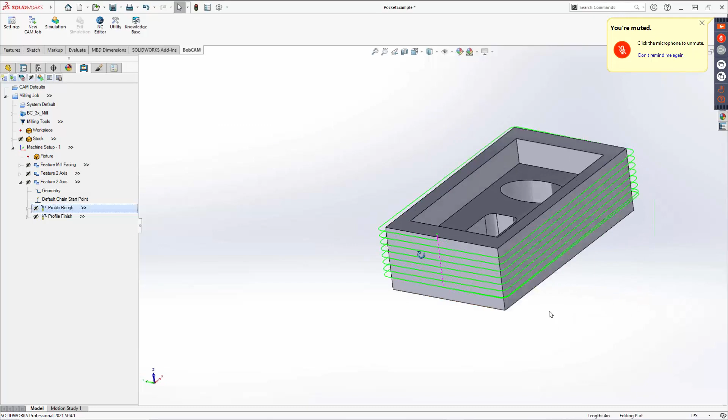I can also add a round, and let's see, you see the corner type, it's kind of easy on the outside here. So you can see the corner type right there.

It's just kind of rounding over on there instead of making a sharp corner. But you also got other options in there for loop radius. And a lot of times I use the corner types mostly in, like I said, plasma and laser, because they don't need to burn around that sharp corner sometimes.

So we use like a loop length, loop radius, or even a triangle. So that toolpath comes out here a little bit, makes a little jog, and then goes in a different direction. Just recently, I have seen milling guys using this bisect line.

The reason why they use it, they're making stairs, and so on the side profile, when they're making the relief, they'll go in that corner instead of stopping right here and going up and over. They go in and do this little bisect line, so they got this little relief so they can put the tread inside there, and then come out and up on there.

On that, let's see, can you remove an inside radius if it's drawn sharp? So yeah, with the inside radius, it is going to leave a radius anyways on there. Like on this one, on the pocket operation, it's going to leave an eighth in there because I got a quarter inch.

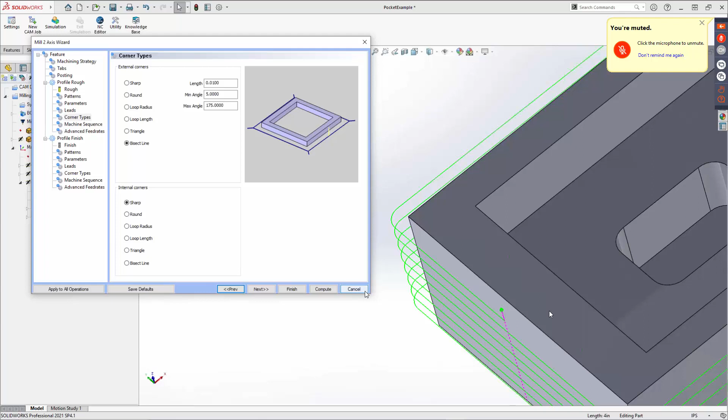I mean, you can go in with smaller tools, and I've done that before, just try to get as much sharp corner as I can if I needed to use that. There's other tools I could have used, but if I was using a router. So there's a reason why you'll probably end up using one of those sometimes if you need to.

Let's see, with that, corner types, with the round, no, you can't on there. If you're using sharp and round, there's basically not much you can do with those. But with the loop radiuses, length, triangles, you probably can. You can set in a length, a minimum, and maximum angle if you want to set that up.

That's probably the only things you can do. But other than that, it's all going to be set up in your drawing basically with that. I'll show you here in a second. Let me make sure, yeah. So let me go ahead and hit save. So with that right now, what I'm going to do is go over here to simulation.

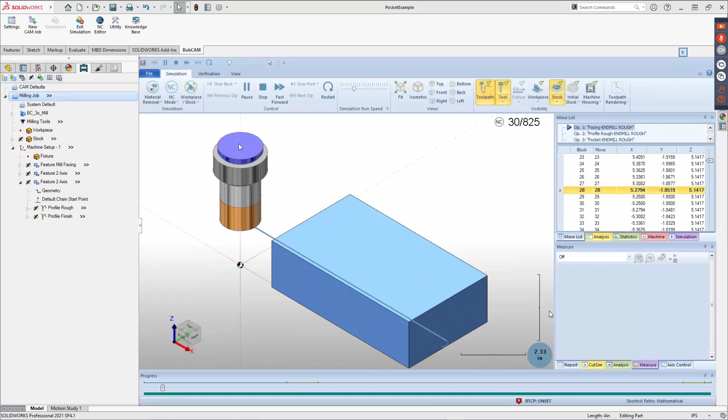So I just hit simulation up here. This is going to open up our simulation window. And with the facing, because I set the top of part at 0.1 and my total depth at 0.1, we're not going to see any stock removal here. Let me go ahead and slow this down. And again, because it's point to point...

Now it's doing the wrong thing there. I don't know why I did the profile cut first. It started from the outside. Should have done the pocket first. Now I'll change that here in a minute.

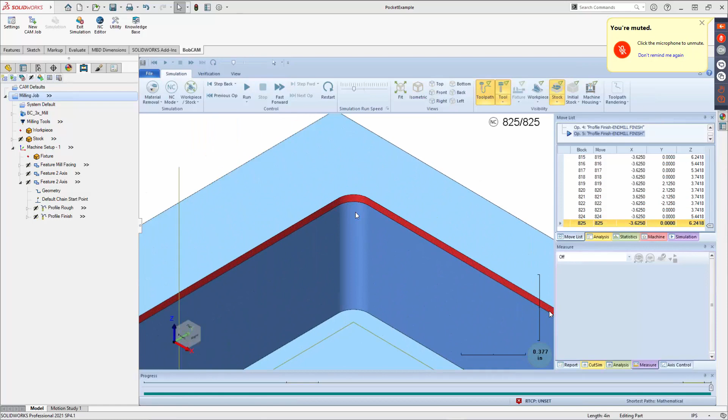And because of the way the tool's set up, you can see here, and I'm not worried about the red in there right now. It's just the way this tool was set up. There wasn't enough flute in there. I think the other one showed up like down here. But anyways...

So yeah, you can see it's got a little bit of radius in there, probably an eighth. Even though it was drawn as a sharp corner, that tool can't go all the way in there because it's going to say, hey, you can only go so far. And of course, it's going to leave an eighth of a radius in there. You could make that bigger, of course, but it's going to be set up in your drawing that way, that you'll have to do that. But other than that, that's probably really the only things you can do with that so far.

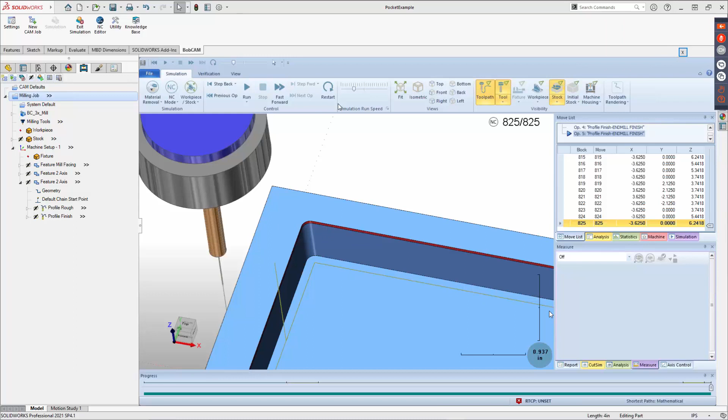Any questions? Any other questions or anything?

Oh, you meant the outside. No, again, that's probably no, that's gonna be the same answer there. With the corner types sharp and round, you can't make anything bigger unless you use a bigger tool, that's the only thing you can do there. But outside's gonna be a little bit different, and that's just gonna be a radius on the outsides here.

So let me exit out of simulation here, and let's go ahead and go under corner types. We'll go round on there. Actually, I'm not too worried about it because it's only going to show.

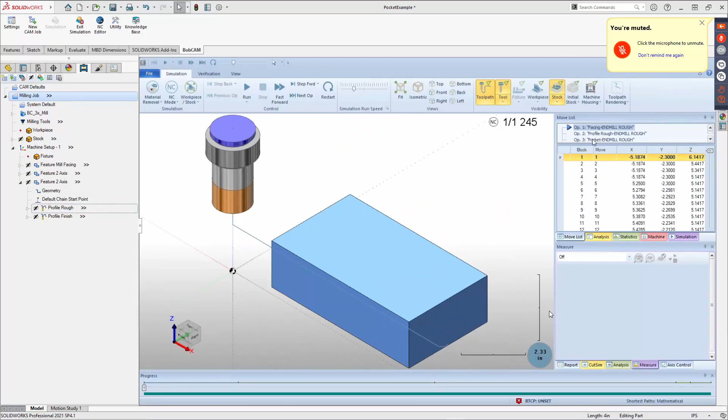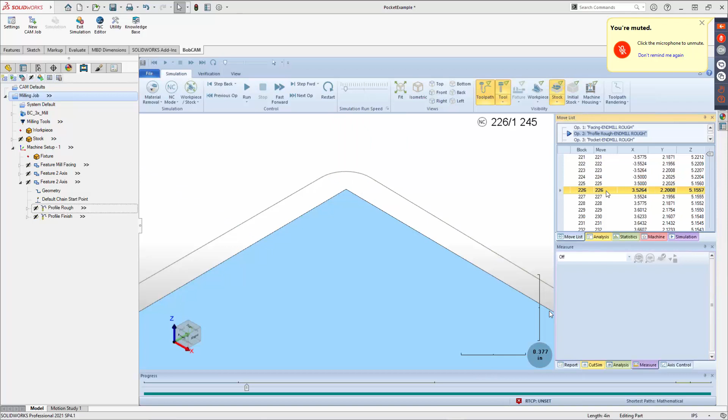So if we go into simulation here, what I'm going to do is profile rough. I'm going to slow this down. Actually, I'm going to run this around the corner, so I'm going to go into move list here, and you can see that it's just rolling around the edge there. And again, on straight areas, it just goes.

So if I would have made an oversize on that, you would probably see a little bit of difference there. But with the sharp, basically what it's doing is going here, stopping momentarily, getting to the position, then coming in this direction, whereas the round is basically continuous movement there. So it should round off the corners. Does that kind of make sense, Jordan?

Yeah, and moving on there. So with this part, if everything works out the way you want here, you can come right up here, create an NC program right here, and that generates all your G code. So there's all your G code there.

I noticed I didn't do a post and save as, I just did a post on there. I can right click in the middle of that G code and hit save as. I can also open up this NC editor here.

Which the first time it opens up, it always takes a minute here, a little longer than I would like, especially during these live events. We can open it up anytime here. I even do this with the standalone. I probably should have opened it up earlier and gotten at least in there.

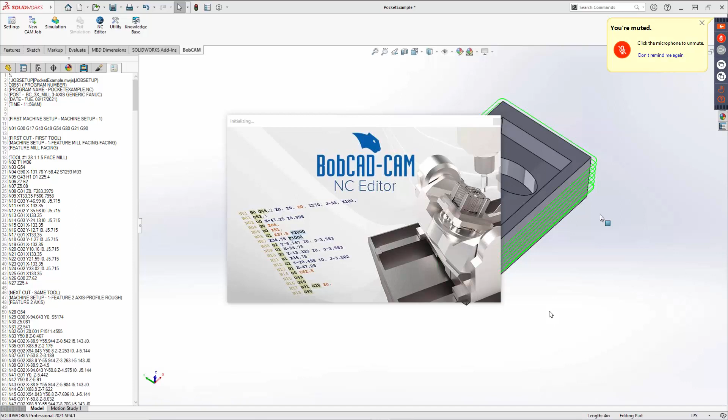All right, so let's do this. No license found. Yeah, right. If it doesn't open up, I'll have to...

There we go. All right, sometimes you just got to do that. Honestly, to answer your question, Tom, yeah, it does take too long to open up the first time. So what I did was on that initializing, I just hit the red X and it showed no license found, so I just reopened it. For some reason it just does that.

You can see we're human too over here at BobCAD.

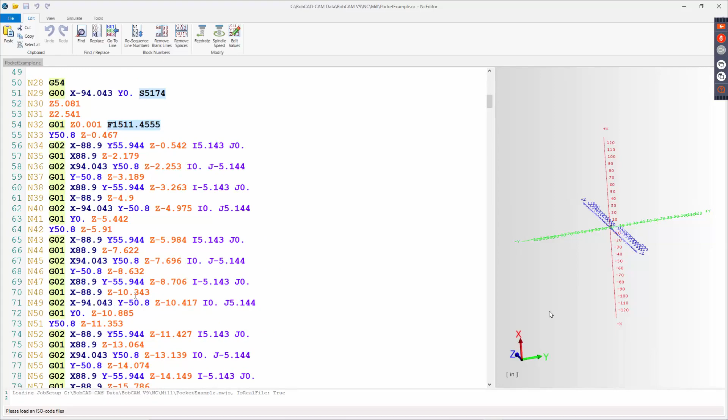I'm not going to go into the pro side of this, but you can see here, even with the standard, you're going to get all the color combinations in there, all your raw text right here, your program number, you can see right there, 951, which I put in. All our G codes are one color, T callouts, H, D callout, your spindle, your X's and Y's are all different colors here. Z's are definitely a different color on there.

So yeah, you can come in here and use this basically as a glorified notepad if you want to. I've had some people do that for whatever reason. I don't recommend that. If there's something that you take out all the time, maybe like sequence numbers, give us a call, we'll be happy to take those out if you need to in your post.

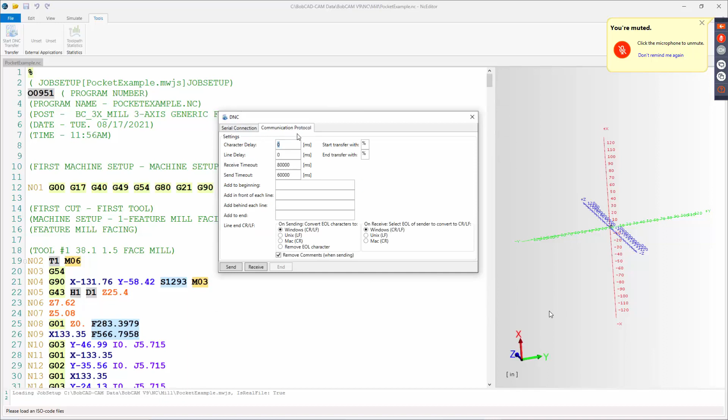Also, other people will use this, and under the tools tab here you've got the start DNC transfer. I don't have any RS232 cabling set up or anything, so again you can set up your port, your baud rate, your parities, data bits, that kind of stuff if you need to, flow control, that kind of stuff, and then your communication protocols there if you need to. So that's kind of the basics on the NC editor.

So again, you can use it as a glorified notepad, and you can also use it to send and receive from your RS232 cabling there.